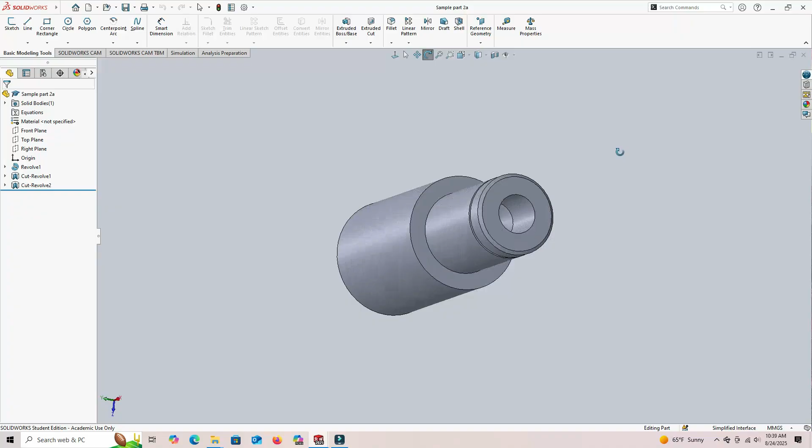Today we're going to revisit this part from my second video, and I'm going to show you how to make a drawing from this part. To start out, I'm going to click this drop down to the right of my new icon, and I'm going to choose the option to make a drawing from a part or assembly.

It's going to open up this text box here. It gives you a lot of different options for paper size and orientation. You also have this option, which is display sheet format. If it's unchecked, the sheet that you're putting your parts on will just be a blank page.

If I check it, it will have a border with things like your tolerance chart, the part name, the revision, who drew it, that sort of thing. Those are all fields that you can fill in. Just for cleanliness sake, I'm going to uncheck that right now.

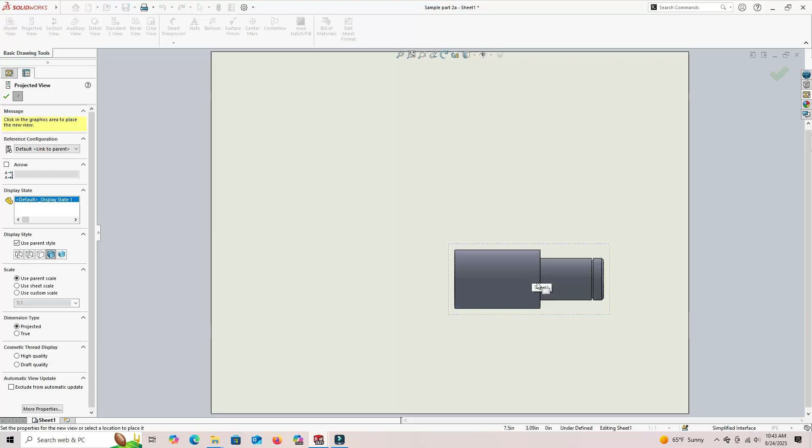When I click OK, it'll bring up a variety of views that you can drag over to your sheet. I'm going to use this front view. It's going to plop that in right there, and if I drag one way or the other, it will just change which side you can see. So you can reorient these as much as you want.

I'm going to put both the left and the right there, and I'm also going to put an isometric view. Let's see, that one's a little cooler.

Once I've got all my views, I'm going to hit my green check mark, and then I can start to move these around. If I move the main view, I can move these up and down. If I'm playing around with the right and the left, the kind of daughter views of the parent view, I cannot move those up and down. I can only do that with my main view.

So it's going to be a little bit tight with this sheet format, but I think I can probably make this work. I want to be able to see things like the holes. And also, let me go ahead and get this isometric view into position.

This is completely independent. I can move that anywhere on the table. I'm not going to be putting any dimensions there. I really only want it there so you can kind of see what the part looks like as if you had it in your hand.

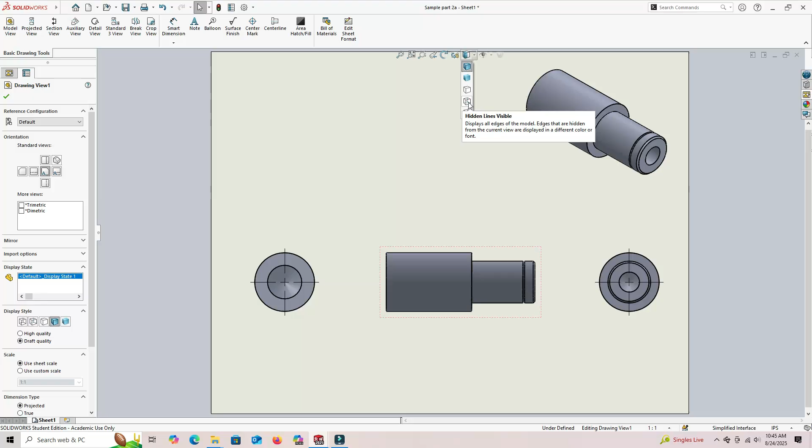Now, if I click the main view here, everything that's on the page right now is as it was in the solid model. That's not exactly what I want on my display. So instead, I can come up here to my display style, and I can choose any of the options that we can see in the model as well. And I think I really want this one, the wireframe with the hidden lines visible.

Now, if I'm on the main view when I do that, it will change every other view. I don't necessarily need that for some of the others, so I can come to the daughter views and click just that one and maybe just make it into that regular wireframe. That makes it a little bit cleaner, and I won't have to see all the stuff that is also on the parent view.

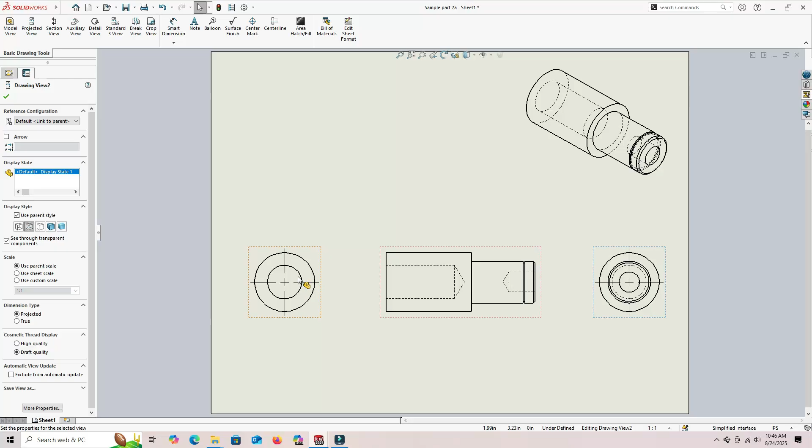Where it gets really muddy is right here. So this is probably actually this hole, and if you were able to see it, you would actually have a dashed line here. That chamfer and the bottom of that slot are actually the same size, so the solid line of the chamfer is actually covering up what would otherwise be another hidden line.

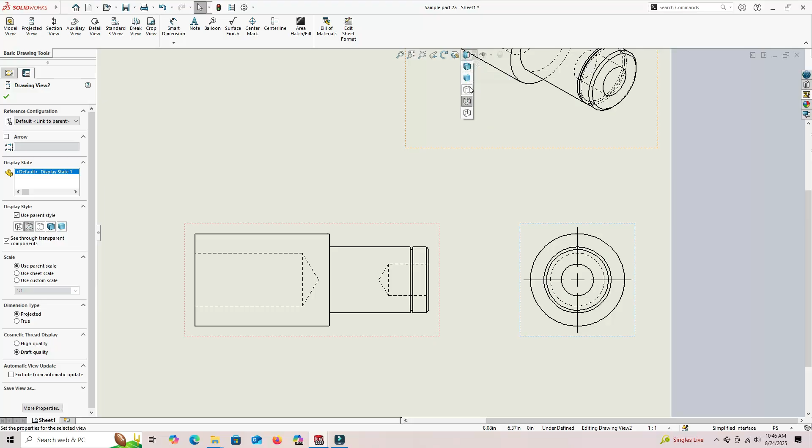Either way, I don't want to see that other view, so I'm going to click that and change it to just the regular wireframe as well. The ISO view doesn't really matter too much, I'm just going to make that a regular wireframe as well. So now this lets us see the depth of the holes with this parent view, but it's a lot cleaner on the two daughter views.

At this point, we can start adding dimensions. And we've got a few different options here. Now, the reason I chose this particular orientation of the part as opposed to one of the others is I am approaching this from the perspective of being a machinist.

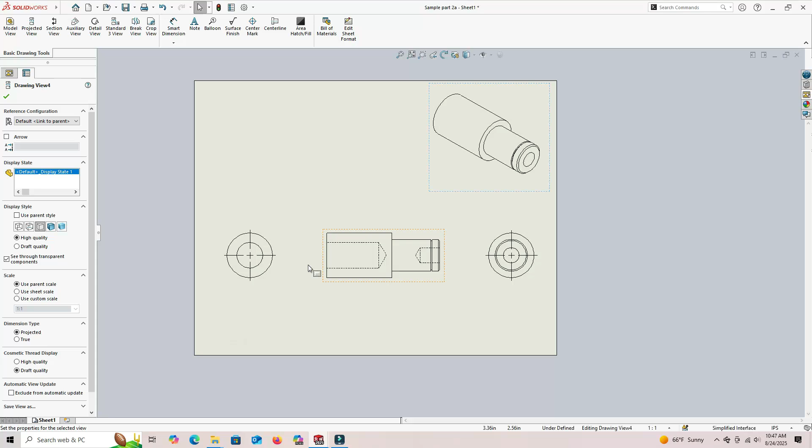And when I put this into a lathe to make this part, my chuck is going to basically be right here. This would be sticking out of the machine, and I'm going to do all of my machining from this end back. So likewise, I want my dimensions to be from that end back.

By the way, you can zoom in and out with the scroll wheel just like you can on the solid model. You can also click your scroll wheel and drag the sheet around. It doesn't rotate it like in the model, it just moves it around.

So let's start putting some dimensions in. We could just click Smart Dimension and start clicking things. That would be suitable for this, where maybe we can call out our stock diameter right there and right there for our hole. By the way, I drew this in metric and it always defaults to inch-pound seconds.

So I'm going to go ahead and change that on the fly to millimeters. You can see it automatically changed our dimensions, but it does kind of kick us out of every command we were in, so I have to click Smart Dimension again.

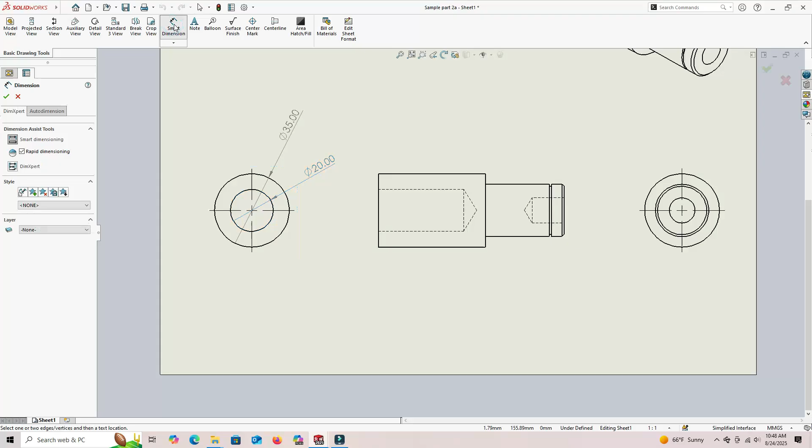And now I can come over here and I can choose this circle, and it will tell me that it's a 12 millimeter diameter. And while I'm at it, I'm going to go ahead and click my chamfer and my boss here as well, and I'll click it over there.

You can move all these around after the fact. So I can move this over here, for instance. Same thing there. I don't know if I'm going to keep those there because it might be a little bit muddy being able to tell what's what. We'll just have to see.

For all of the length dimensions on this piece, I'm going to do what's going to make it cleanest, which is what's called ordinate dimensions. So I'm going to come to my Smart Dimensions icon, click the drop down, and you have all these options for your dimensions. I'm going to just choose ordinate.

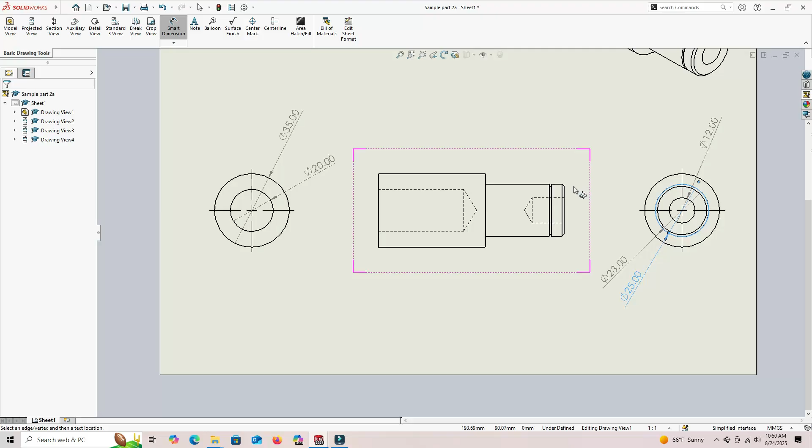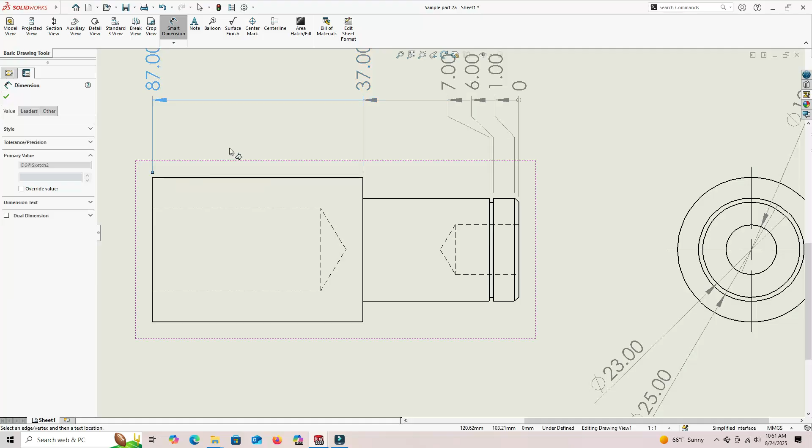Then the very first thing you click is going to be the 0 for that particular string of ordinate dimensions. So I'm going to click this corner right here, and you can see it just says 0 right there. Then every single time I click something else, it automatically puts in the dimension. So all I have to do is start clicking all of these points, and it'll snap the dimension right to it.

This works very, very well for lengths. You see that it keeps everything nice and tidy in one line, and it makes it very easy to read. You can just follow the line and say, okay, that chamfer goes back 1 millimeter, from the end the groove starts 6 millimeters, it's 1 millimeter wide, and you avoid having multiple datums.

This is also way, way cleaner looking than if I just did regular Smart Dimensions. Let me actually show you that on the underside so you can see what that would normally look like. If I went from the end to this line, for instance, you'd have this, and then you'd have to do the same thing to there, and the same thing to there.

And you can see this is going to start looking really muddy really fast, and it also takes up a lot more space. This is one way that you can make things look extra clean, easy to read for the person who's actually making this part, because you get into all these little lines and things start disappearing pretty quickly.

So I'm going to get rid of all these dimensions right here, all the extraneous ones. I just clicked on them, left clicked on them, and then hit delete.

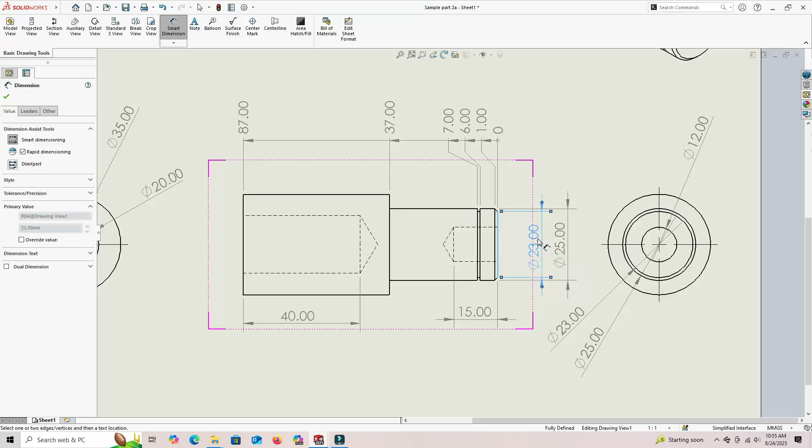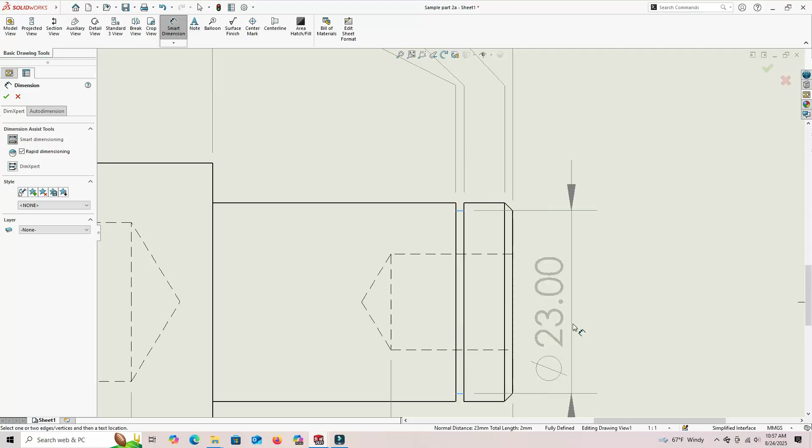Let me go ahead and delete these. Now the retaining ring groove, or O-ring groove, whatever this is, is a bit of a special case. I could click Smart Dimension, zoom way in here, and click those two lines, and it should look pretty readable. Once I hit escape, you can see our dimension lines coming off of that, and it says it's a diameter of 23 millimeters.

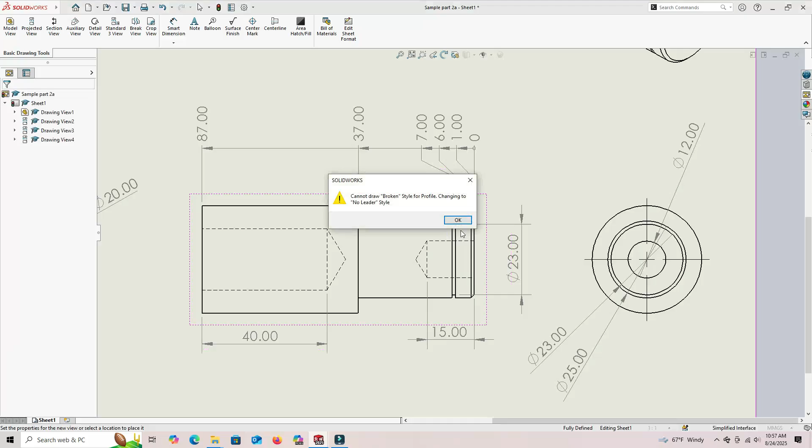That's pretty clean. Another way of doing that would be with this, which is called a detail view. I can click that and draw a little circle around that section of the part. It usually pops up with this dialog, and I'll just say OK. I can put this detail that's shown in that circle I just drew anywhere, and you can see it shows a scale as well as some other information about the detail.

Over here in the bottom left, I've got my scale section. I can click that dropdown and blow it up to, let's say, 4:1 or maybe 8:1, something like that, whatever fits. I think 8:1 is a little big. I can drag that around just like any other view, and I can actually dimension this drawing as well.

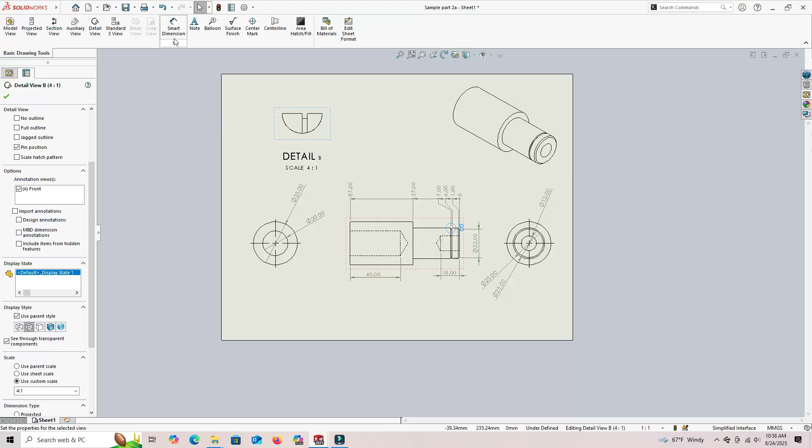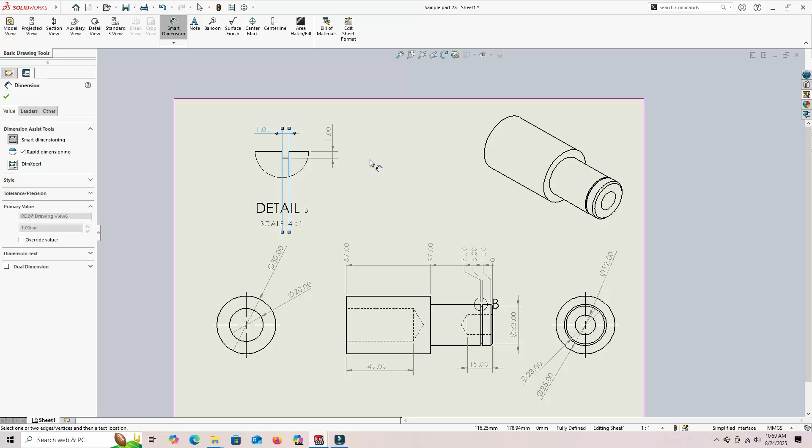So if I go into Smart Dimension, I can say that that's 1 millimeter deep and 1 millimeter wide. From there, that's maybe not the most ideal way of doing things, but you'd be able to say, okay, well, that groove starts 6 millimeters back from the end, and those are the dimensions for it. That's not strictly necessary, but for tiny little details like this, it's a good way to do it.

I'm going to go ahead and undo all of that because I don't want that on my print. And let me show you a couple of other little things here.

Speaking of scale, in this particular case the scale ended up being 1:1, but you have a scale reading down here in the bottom right, and you can change the scale of your drawing. So if you have a really small part or a really large part, you can change the scale so it will fit onto your page.

That's a double-edged sword though, because sometimes you either make it so you can't see the various details of the part, especially on really large parts that are shrunk down, or you blow it up to the point where it's not usable on that particular size of sheet, and you have to go up to a different size sheet.

I believe here I have everything pretty much dimensioned, and at this point I'm just going to make it look a little more readable. So I'm going to get my diameters roughly in the same spot. This one's a little hard just because... yeah, maybe that looks good.

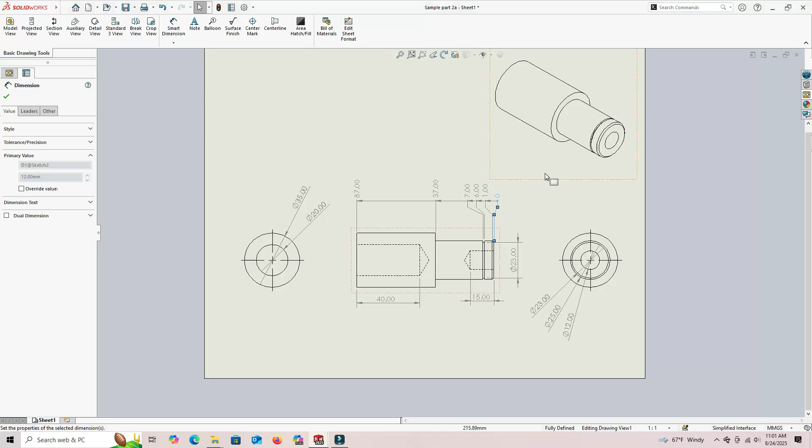Let's see, our ordinate view—pardon me, our isometric view—we'll kind of shift that around a little bit. It looks a little better centered on the page.

Once you're happy with how everything looks on the page, you can pretty much save it and print it and all that. You will end up running into issues with where your dimensions will be if you use the sheet format. This video is already starting to get a bit long, so I'm going to cover the sheet format in part 2.

I won't rehash too much of this. I'm not going to put all the dimensions on there, but there are some considerations when putting the views onto the part because you don't have as much real estate. What I really want to cover there is everything that's in the border and how to edit it.